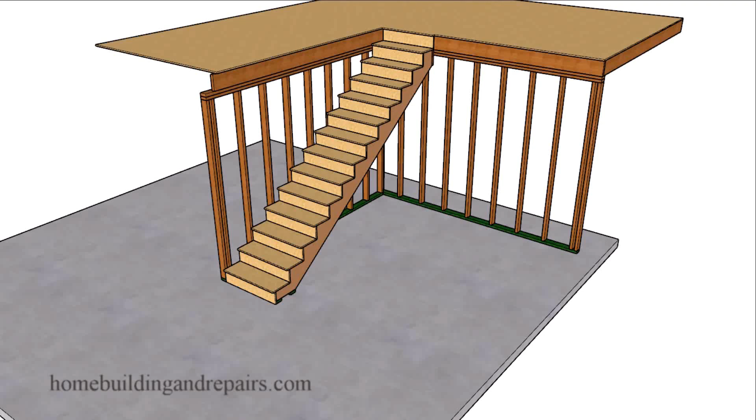In this video, I will provide you with the basic information you're going to need to add a landing at the bottom of a stairway.

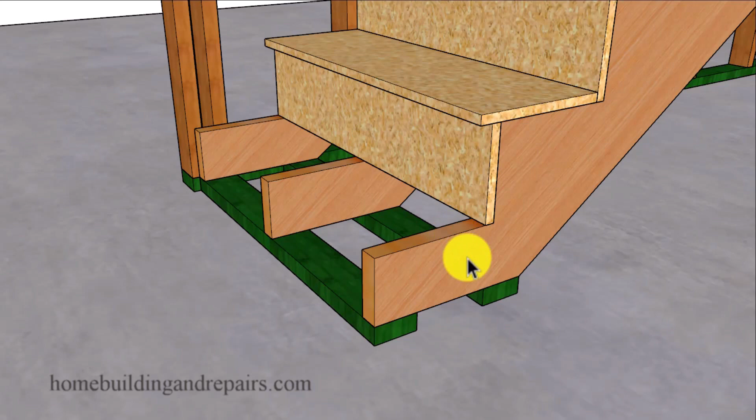Now, the first thing you're going to need to do will be to remove the first riser in some cases, or the first tread. Now, you won't need to remove these all the time. However, in our example, we are going to remove them and measure the height of the stringer that sits on top of the treated lumber.

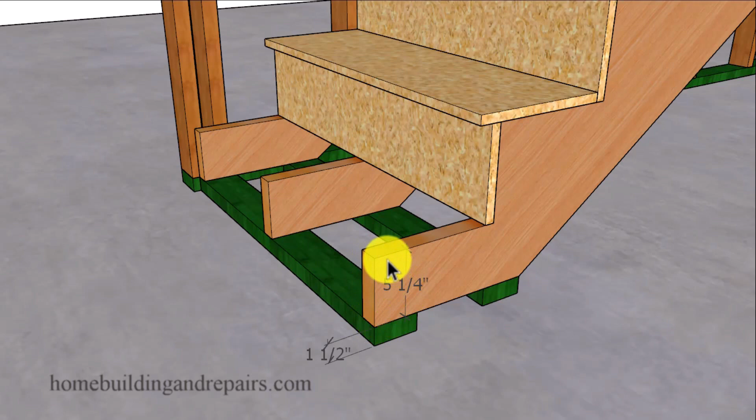And if yours is not sitting on top of treated lumber, you can simply grab a piece of treated lumber, butt it up against the stairway, and then measure the distance. And in this example here, we have 5 1/4 inches. And that will be the height of our floor joist.

So we're going to need to cut a 2x6 that is usually 5 1/2 inches tall down to 5 1/4 inches, as long as we're going to be using a full 1.5 inch piece of lumber for our sill plates.

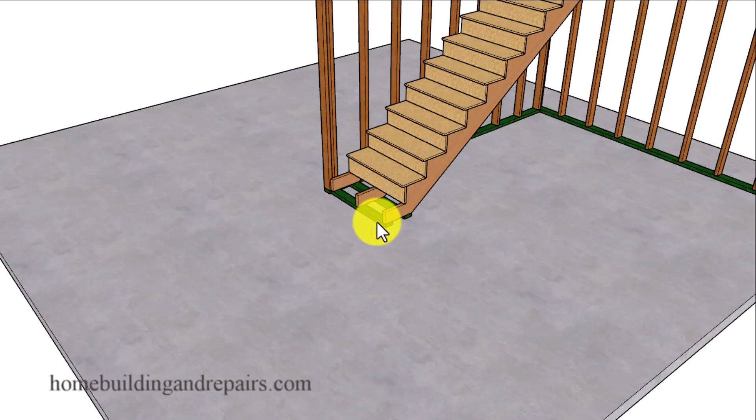Next thing, let's go ahead and draw the perimeter of the landing. And of course, your design can be different.

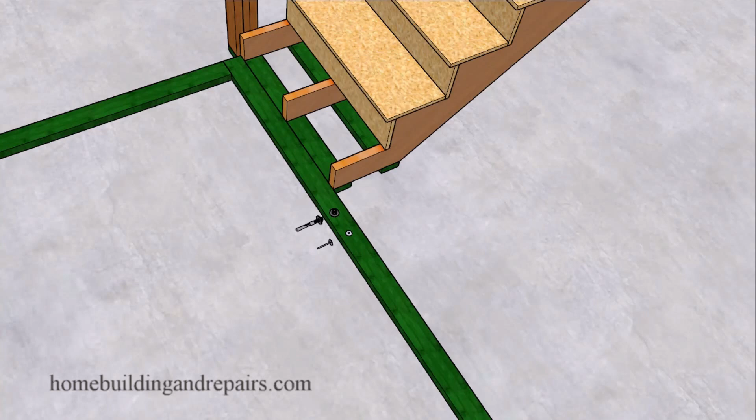Then we're going to cut our base framing plates, or the plates that our 5 1/4 inch tall lumber will be sitting on. Now, you can fasten these to concrete with some type of a wedge anchor, framing anchor like this one, that will require you to drill a hole in the concrete.

Or you can also use some type of epoxy and all threads. And in some cases, you might be able to get away with using a shot and a pin. This is a type of nail that can be driven into the concrete with a tool that can usually be purchased fairly inexpensive or rented from your local rental yard.

And if you are going to be attaching this to a wood framed floor, you can usually use nails or screws and even put some type of an adhesive underneath the framing plate.

And it wouldn't be a bad idea to position all of the pins or the framing anchors in a location where they will not interfere with your rim joist or your floor joist.

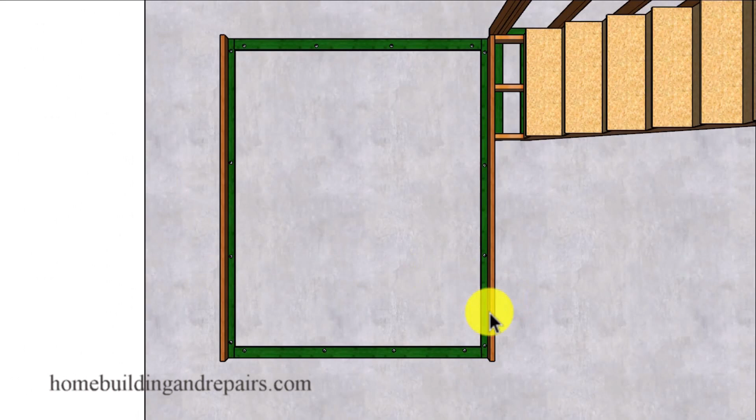And to give you a better idea of what I'm talking about, let's go ahead and install the rim joist on each side. And if for whatever reason you need to notch any of the framing components for the floor joist or the rim joist here, that's usually not going to be that big of a deal.

But you can see here where all of the pins are located in an area where they are not going to be underneath any of the other joist or the rim joist. So if you can avoid that, make sure that you do.

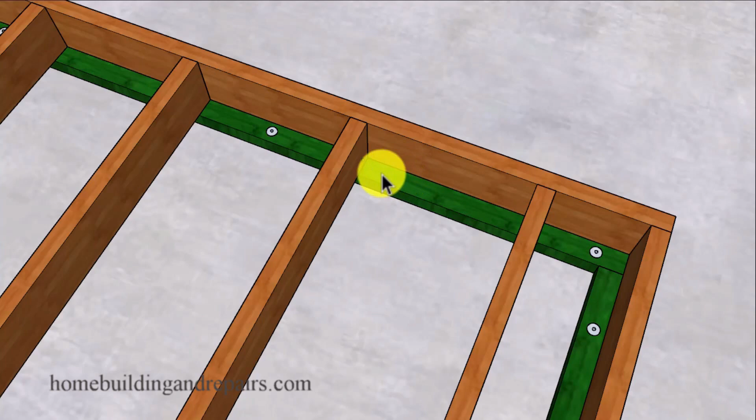And you can fasten the joist to the framing plates with a toenail or an angled nail, usually a 16D. And I will leave it up to you whether you use a common or a sinker nail.

And let's not forget that you might need to check with your local building department to verify whether or not you can actually make this modification to your property, as I try to mention in most of my videos.

And of course, you can end nail the joist through the rim joist with 16D nails also. I usually like to install 3 for 2x6 or 2x8, and then 4 for a 2x10 or a 2x12 joist. And if for whatever reason you're using a 2x4, 2 nails should work for that.

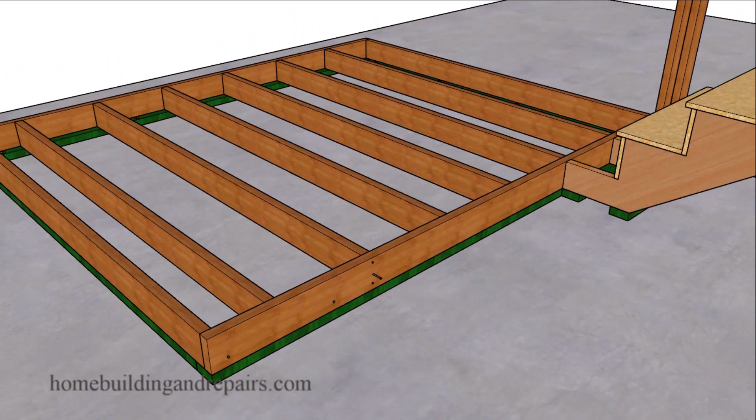And of course, the rim joist can be toe-nailed, about 16-inch on center spacing for the nails to attach it to the framing plates. And after you have secured all of the framing, you can go ahead and install the floor sheathing.

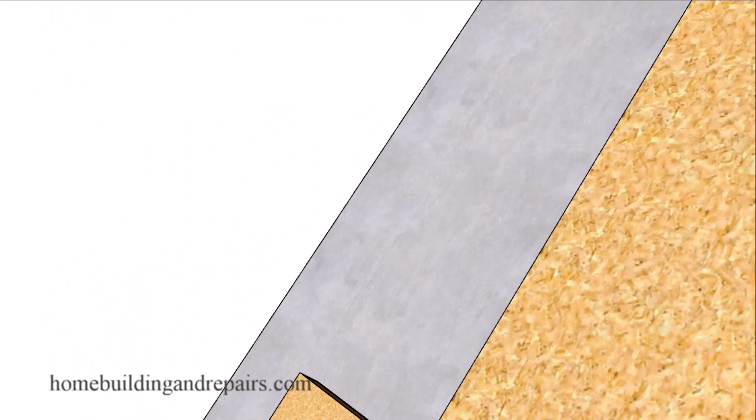And in our case here, we are using the same thickness, 3/4 of an inch thick sheathing, the same thickness as our treads. If you are going to use materials with different thicknesses, make sure that you adjust accordingly.

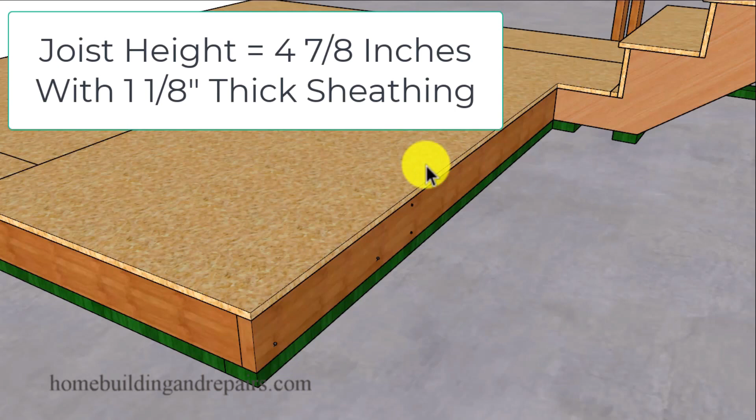For example, if I was going to use 1 1/8 material, I would need to lower this another 3/8 of an inch to prevent riser variations in the stairway or different height steps.

And another thing you might consider doing will be to put an overhang in the area that will be used to step down off of the platform onto the floor. And that would look something like this.

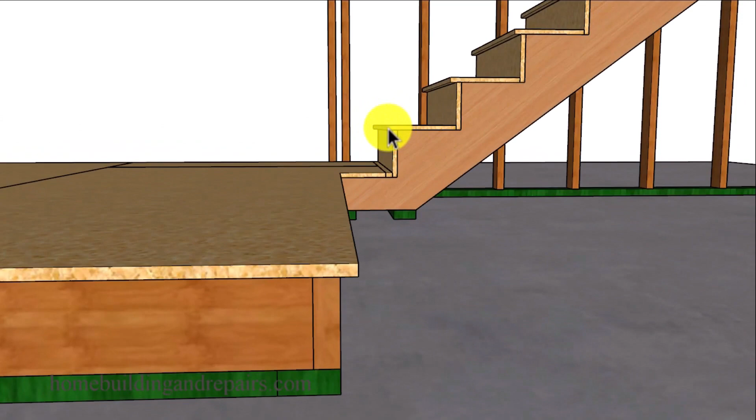The same overhang that we have here will be the one that we are using on the stairway. 1 inch overhang for the stair steps, 1 inch for the landing. And you don't need to put this on the landing if you don't want to.

However, the step down will usually look better if it matches the stairs. And obviously you will not need it in any area that will be up against a wall or a section of the landing that you will not be using to step down off of the landing.

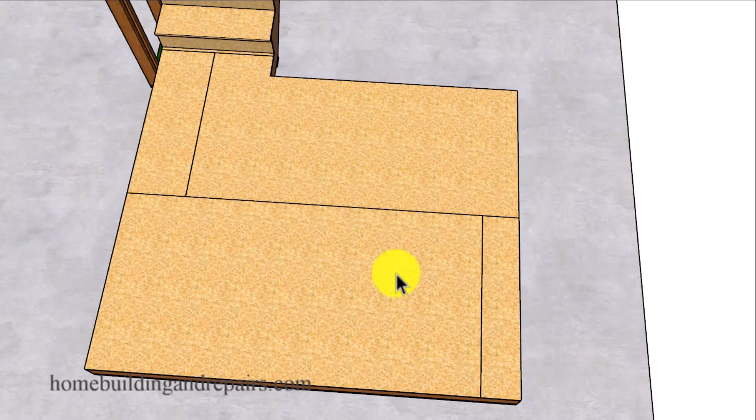So if you're going to be able to step down off the landing in this direction and in this direction here, then you might consider using a 1-inch overhang all the way around the deck.

Another thing you might consider doing will be to bring the landing out to where it lines up with either the first step or the front of a riser, if this will work better for your design instead of coming back a little bit and then over.

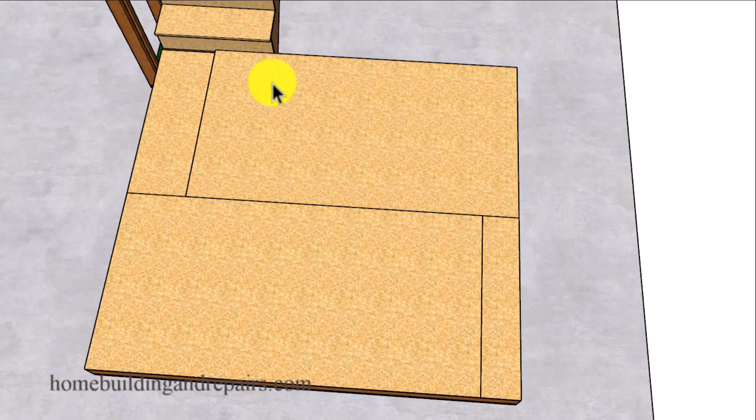And of course, consider making the landing a little shorter. If this landing was about 1 inch shorter, we wouldn't have this small piece here.

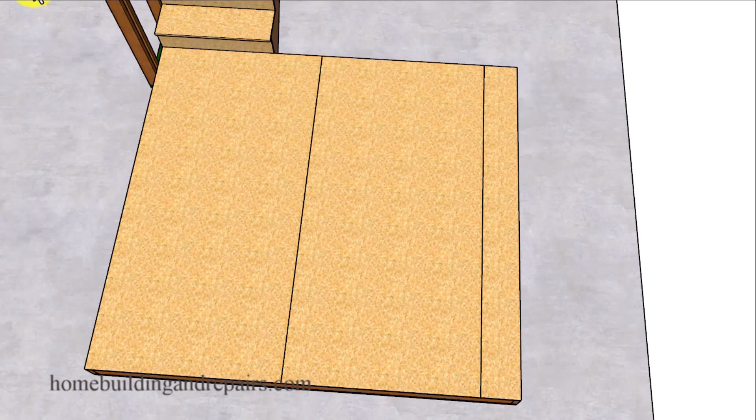However, that won't work out all the time, and you might need to make adjustments to the sheathing or to the joist. And of course, we can change the direction of the floor sheathing if that's going to work better for us along with the floor joist.

And you can always add 1 or more of the base framing plates if you want to make the floor a little stronger. And I've actually done something like this when using 2x4 joist, if that might work better for your project.

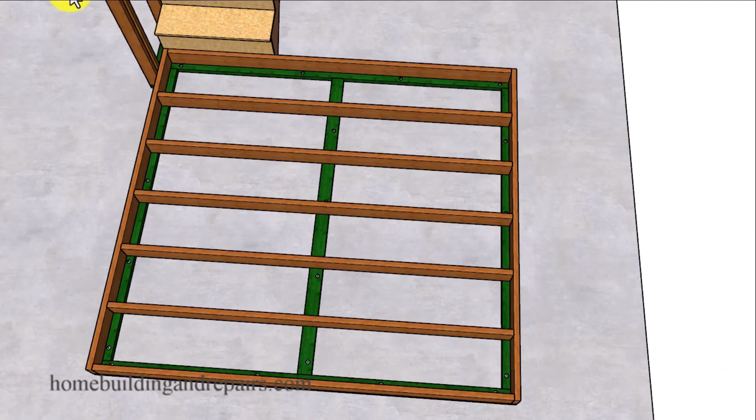And for those of you who have noticed, we have cut the ends of the stringer off so that we could butt the joist up against the stringer. And again, another idea that you can use if that's going to work better.

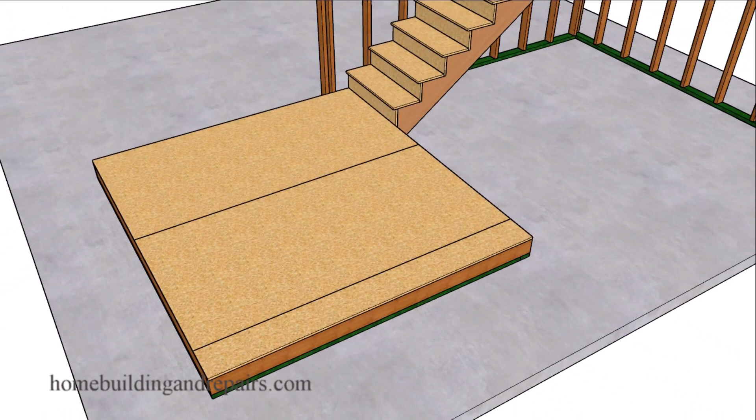And of course, you can see here where the height is exactly the same for our newly remodeled platform. And something like this will definitely make the building inspector happy.